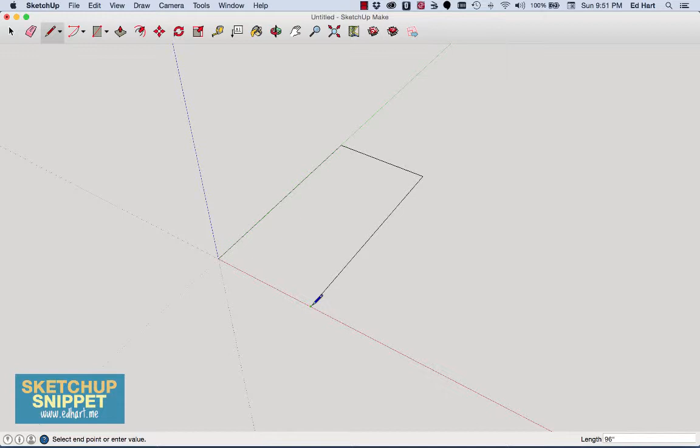Now I'm going to take my pencil, still clicked, and pull it down along the red axis, and type 4 single quote, and now I've got a 4-foot length. Then I'll drag it back along the green axis, and SketchUp will change the color of your line when you're right on the axis, and go all the way back to the red, and click. Then I'll just close this plane right here with my pencil, and now it's automatically filled in, and I have a plane that I've made with my pencil tool.

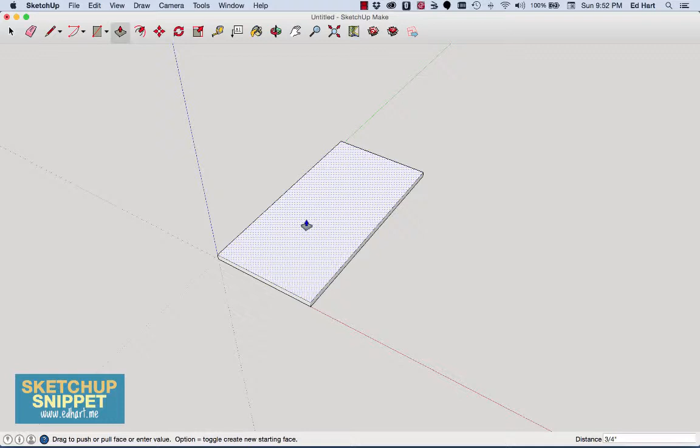Now to make it 3/4 of an inch, I'm going to grab this push-pull tool, click it, click on the surface of my plane, and then I can either drag it up or down with my mouse, whichever way I want to go. I'll just type 3/4 inches right there, and I've got a double quote this time since I'm doing it in inches and not feet. Hit enter, and now I have a piece of 4x8 plywood that I've drawn with my pencil tool.

Now I'll show you how to draw it with the rectangle tool. I'm going to click on the rectangle tool, come over here right next to it. Now I have a pencil with a little rectangle by it, and I'm going to click. You'll see as I pull this out, there's actually two sides that are changing as I move my pencil. So rather than trying to space that out, I can just type 4 feet, then a comma, then 8 feet, just like that.

And so there I have my rectangle tool. Now I've created the same plane, and I'll grab my push-pull tool again, click on the surface, drag it up, type 3/4 inches, and that's the second panel that I have.

Now I'm going to grab my hand tool and just move things over a little bit, because I want to show you the third way, and this is a tool that I really prefer when drawing because I have a little bit more control over how I draw my various panels and boards out, and that is the rotated rectangle tool. So I'm just going to click on that, and you'll see now I have this protractor looking thing.

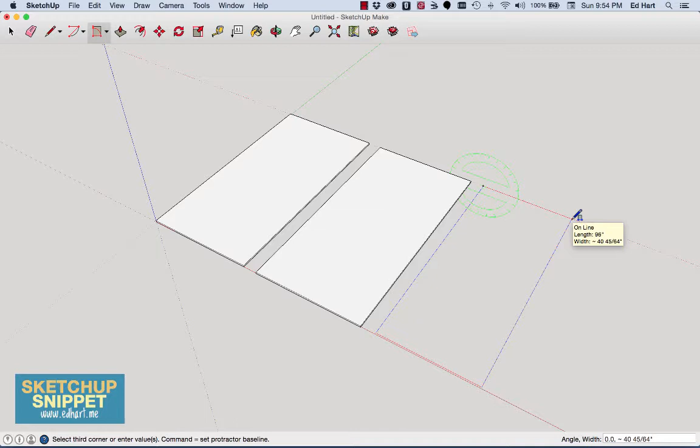I'm going to come over here to the red axis, click to start, and drag my line on the green axis 8 feet. I'll just type that in again, and now I can rotate the plane to be wherever I want it to be. You can see my red axis shows up, and my thing sort of clicks to it. So I'm going to drag this out at a 0-degree angle, and type 4 feet and hit enter.

And now I have my same plane, and again I'll take my push-pull tool, click the surface, and drag it up 3/4 of an inch, and I have 3 plywood panels that I've drawn with 3 different tools: the pencil, the rectangle, and the rotate rectangle.

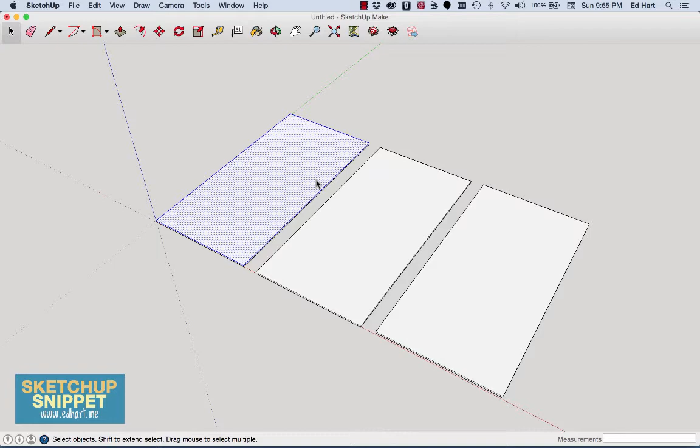Now, the important thing to remember whenever you're drawing boards is once you've created them, you need to group all of the sides together. To do that, I'll triple click on each of the objects. If I click once, I highlight one plane. If I click twice, I highlight that entire all four sides. If I click three times, you can see I've highlighted everything. Once I highlight everything, I'll either right click and hit make group, or do edit and again make group right there. So now I've turned that object into a group.

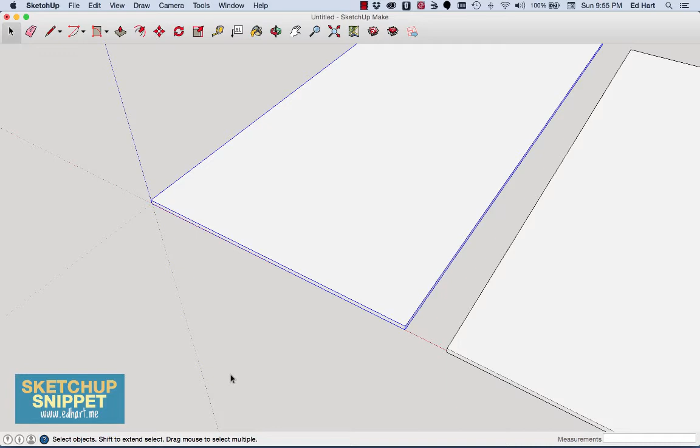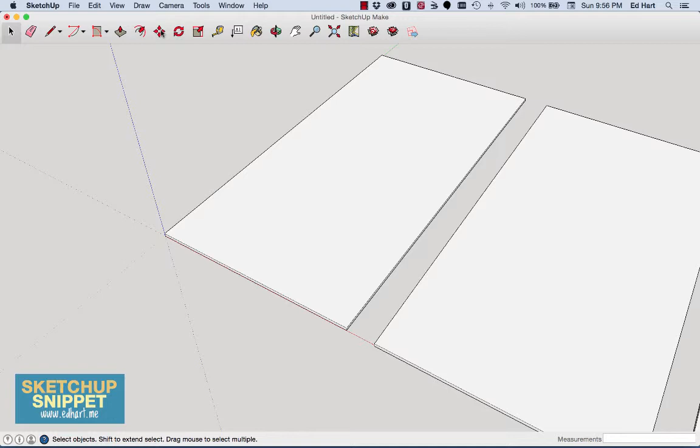Now why would I do that? Well, let's suppose it's not a group. I'm going to explode it back out, and I want to move it around. So I can grab my move tool and go to the corner. If I click that corner and start moving around, look at that - that's not what I want. Let me hit escape. But if I triple click and turn it into a group, then select my move tool, now when I move it around, the whole thing moves around.

So I've shown you how to draw a plywood panel, 3 different methods: pencil, rectangle, rotate rectangle, and I've told you how to create a group out of the various planes on each object.